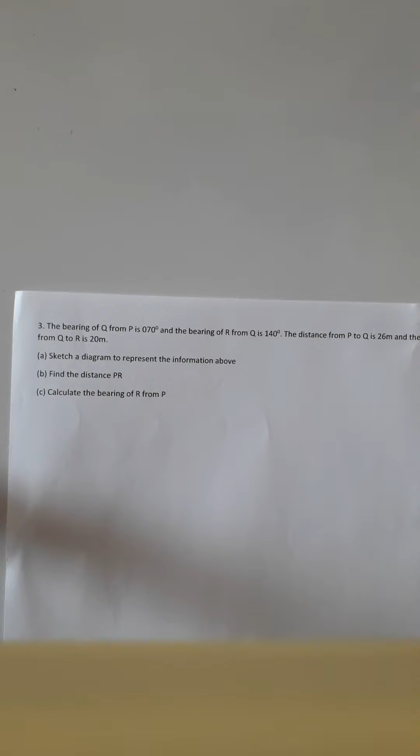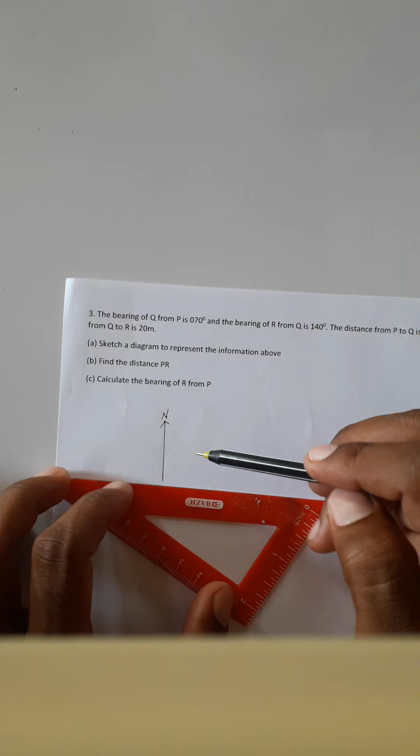Just try to draw a reasonable size diagram, not too big, not too small. The bearing of Q from P is 70 degrees, so here's 90. 70 degrees, so here will be P, the bearing of Q from P. So we start at P and then we head into Q, 70 degrees.

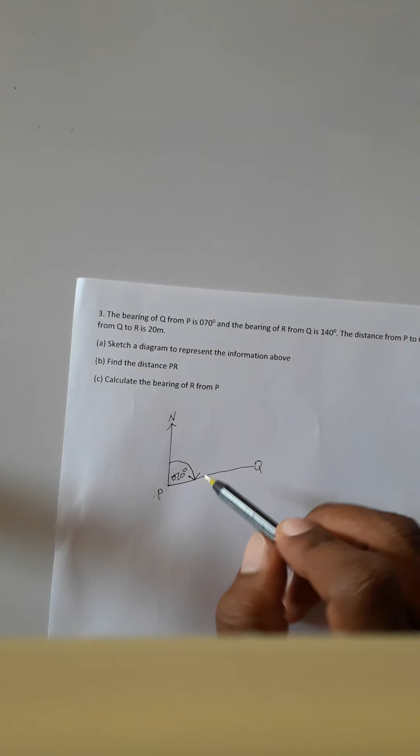And what is this distance? The distance from P to Q is 26 meters, so here's 26 meters. The distance from Q to R is 20, so this line Q to R will be shorter.

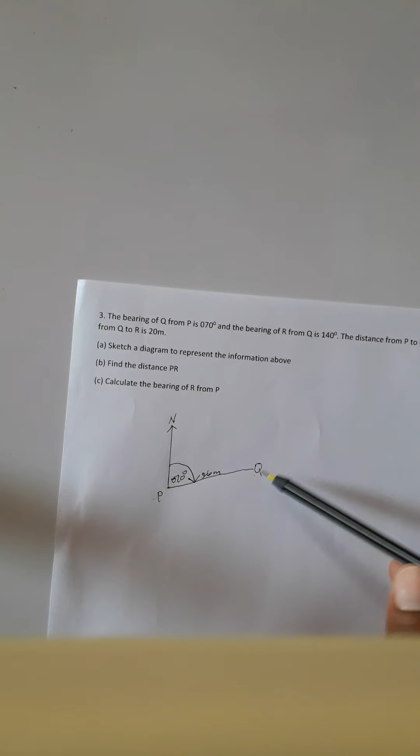What else? The bearing of R from Q, so since we are starting at point Q, we need to have a north line at point Q. The bearing of R from Q is 140 degrees. Ensure that this north line needs to be perpendicular, not slanted, so try to get it as straight as possible.

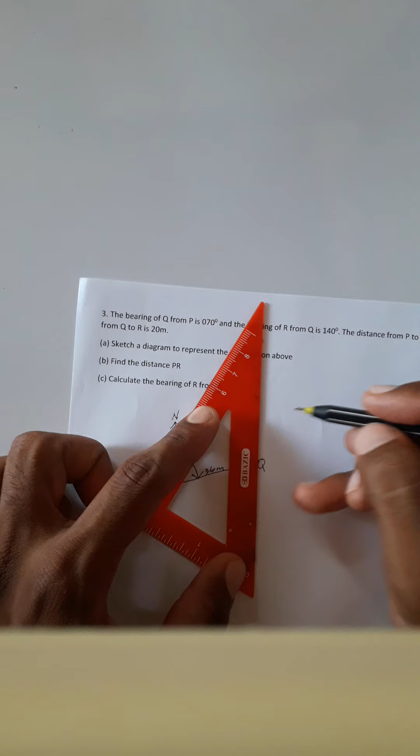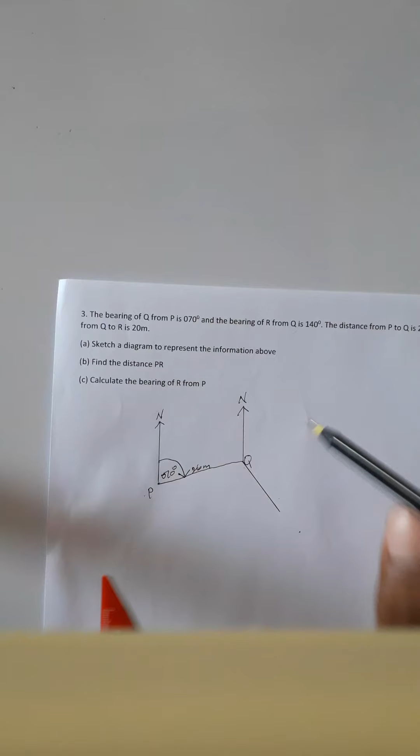The north line can have any length - it can even be longer than that one, it doesn't matter. So here is 140 degrees. I know here's 180 if I go straight down, where of course is 90. 140 should be somewhere there, so that is shorter. I'll get this line shorter than that one because the distance QR is 20, so here's 20 meters.

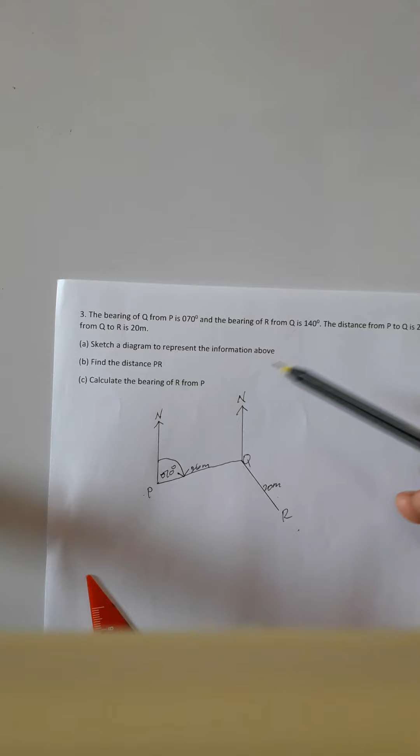Good, so that's our diagram. Part A is done. Part B: find the distance PR. So we want to find here.

I'll draw a broken line, and project this line. Don't forget to write this in - here's 140 degrees, I can write it inside or outside. Since from here to here is 140 degrees, this part inside will be 40 degrees, this little part. And here now, let me put it like this.

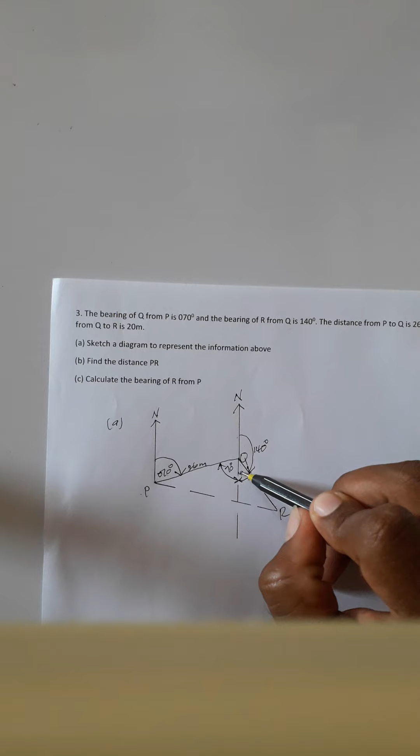So you can follow, here will be 70 and here will be 40. So the entire angle now will be 40 plus 70, which is 110 degrees.

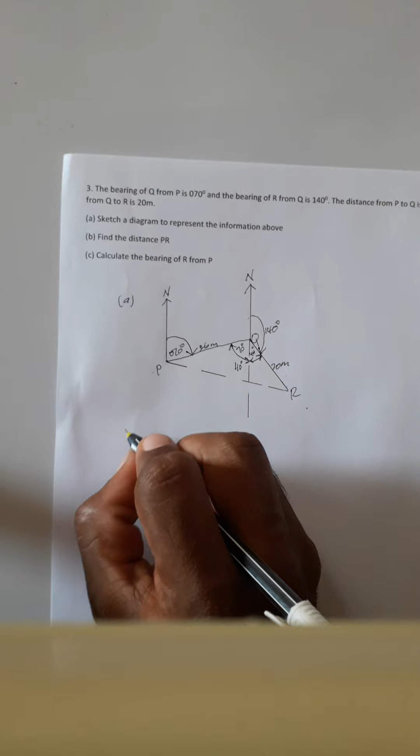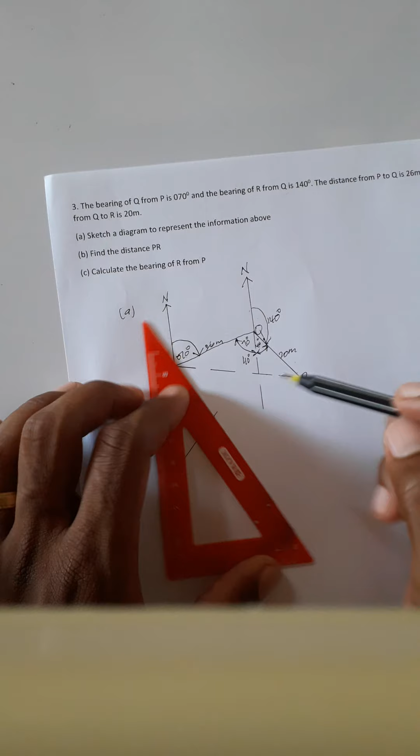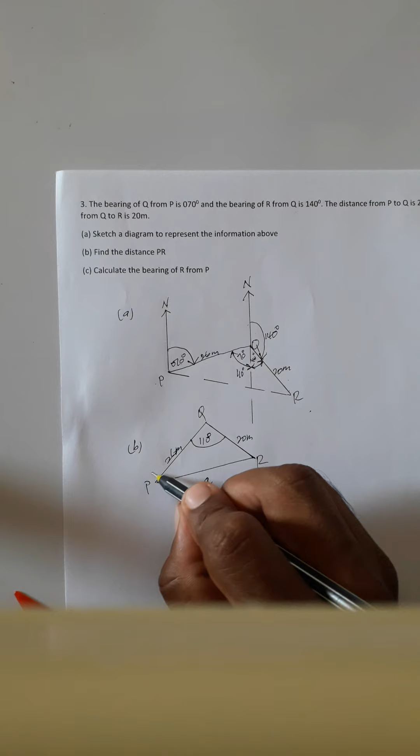For part B, what I need to do is draw back that diagram. So I have P, Q, R. Here's 110 degrees, it's 26 meters, 20 meters, and I need to find here. So here will be small q, small r will equal to that, small p will equal to that. So we want to find for Q, so you'll write the Q formula.

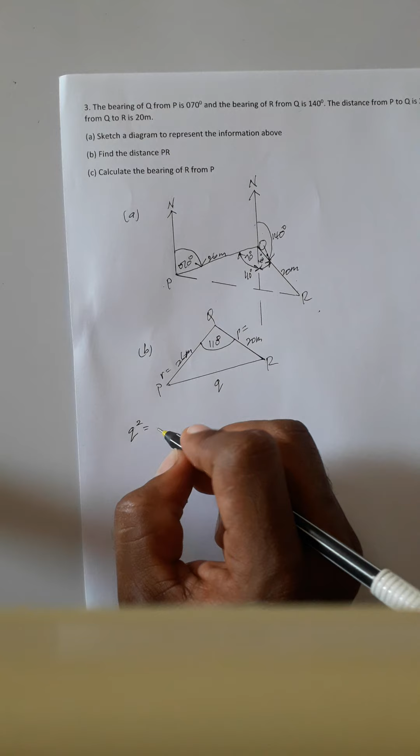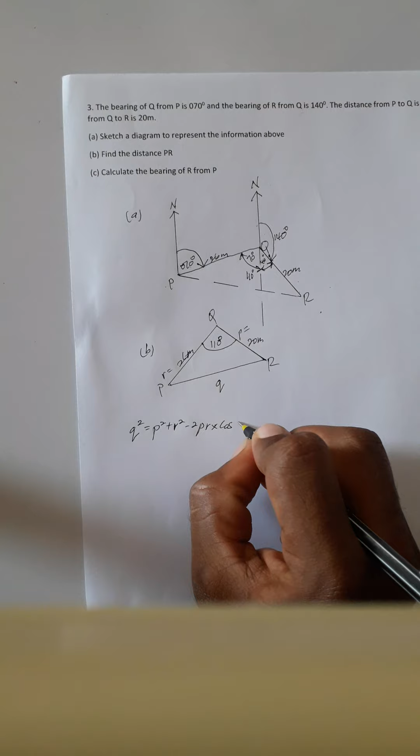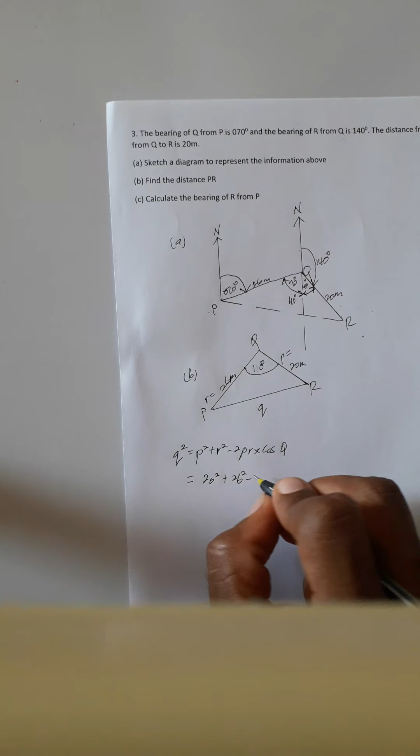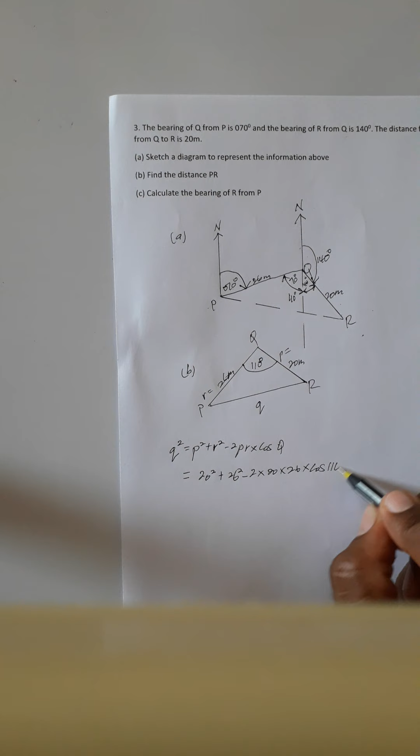Q squared will equal to P squared plus R squared minus 2PR times cos Q. So all we need to do is substitute the values into the formula. Here I'll have, what is P? P is 20, so therefore I have 20 squared plus 26 squared minus 2 times 20 times 26 times cos 110 degrees. If you want, you can take out the degree sign or write it, it doesn't matter.

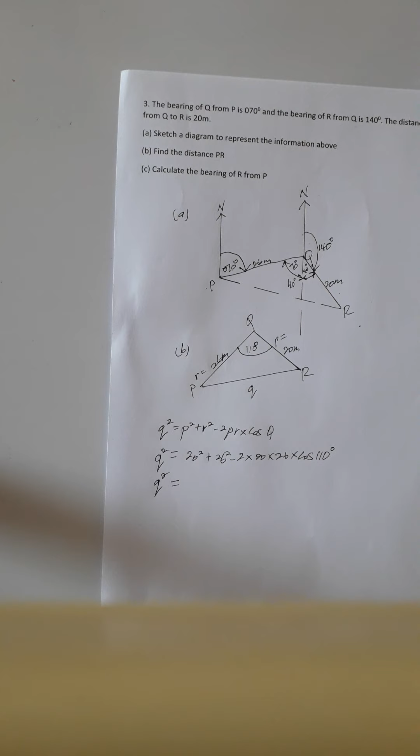So now we'll use our calculator and work all of that at once. 20 squared plus 26 squared minus 2 times 20 times 26 times cos 110 will give us - what do we have? 1431.701. So we have Q squared now.

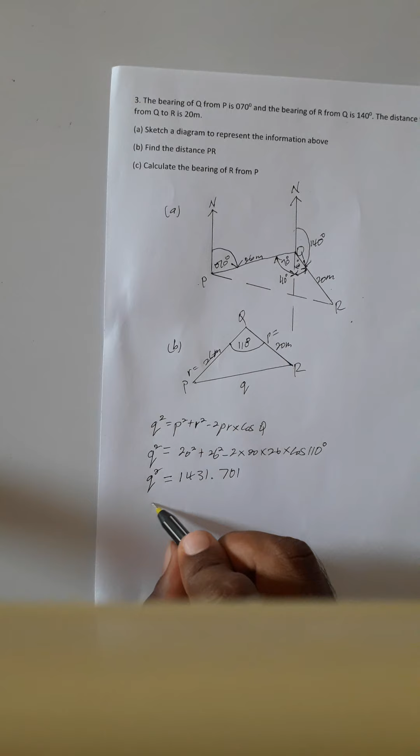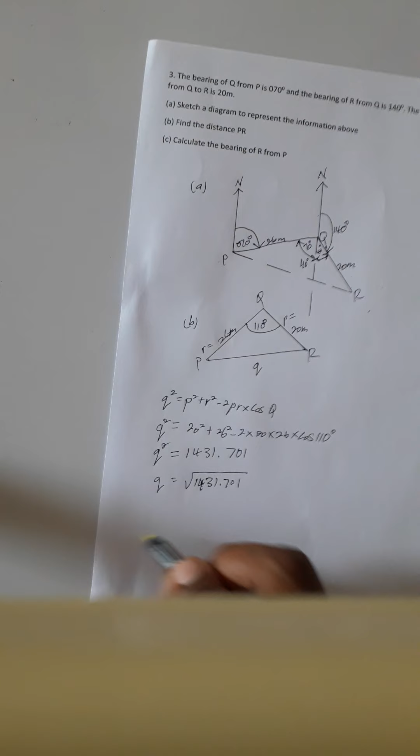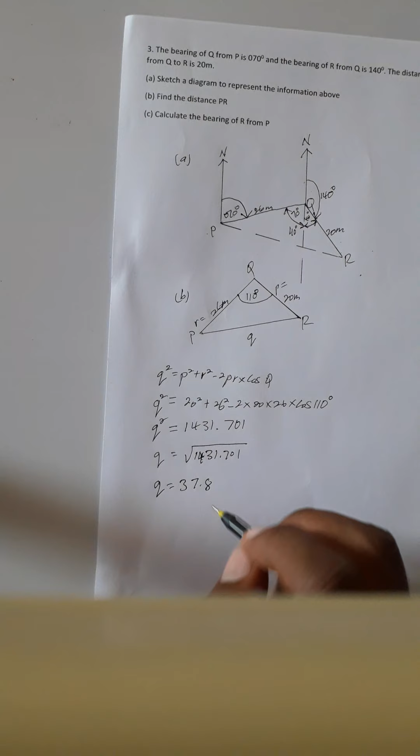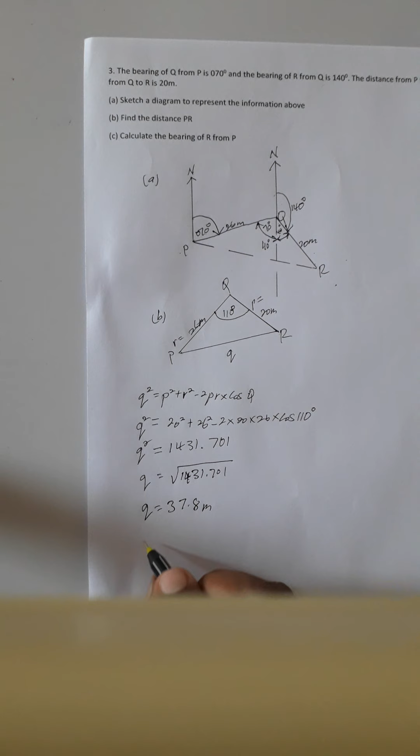We'll square root, leaving our answer in the calculator and we square root the answer. So let us square root our answer now. What do we have? I'll write it to one decimal place. I have 37.8, and that will be meters. So I can write now, since we want to find the length of PR, I can write PR equals 37.8 meters, correct, to 1 decimal place.

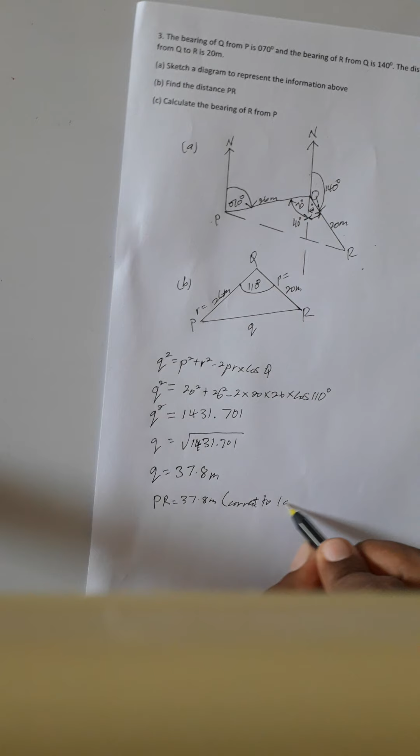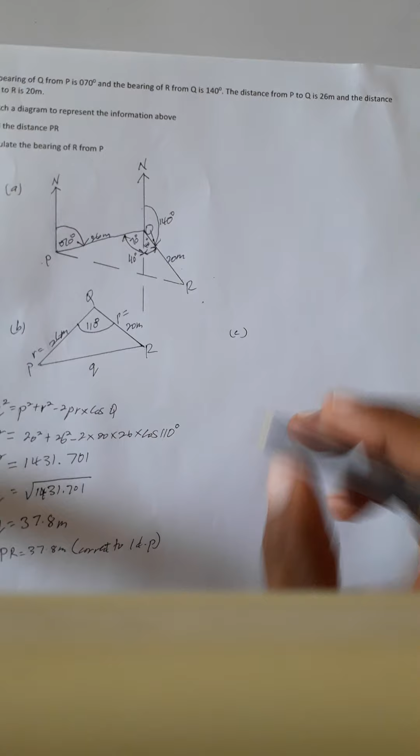Good, so that's part B. Now let us move on to part C, which I will do here. Part C: what does it say? Calculate the bearing of R from P, the bearing of R from P. So again, I need to find this.

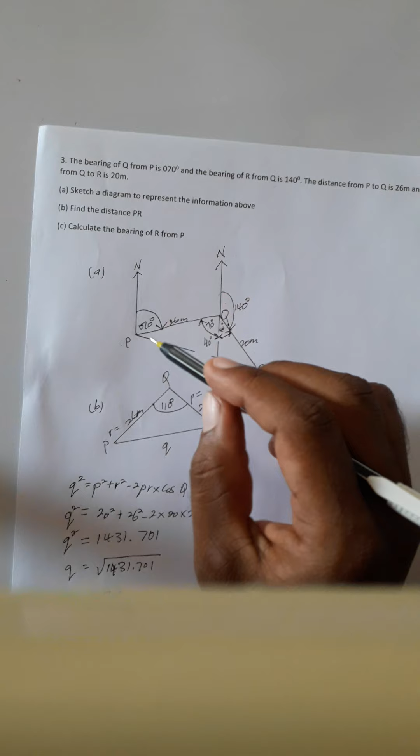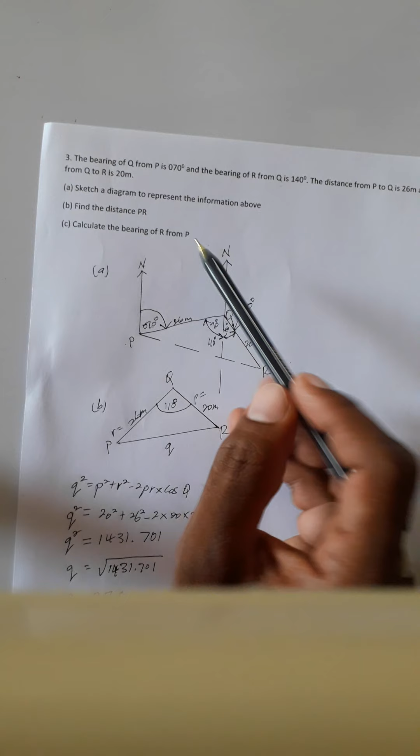So we know that this line here connects R and P, right? Again, if this question is calculate the bearing of P from R, at R we'll need to draw a north line and then get that bearing instead. Very good, so calculate the bearing of R from P.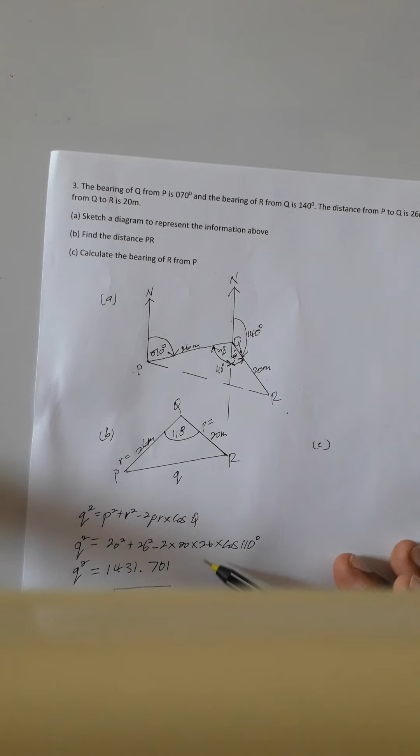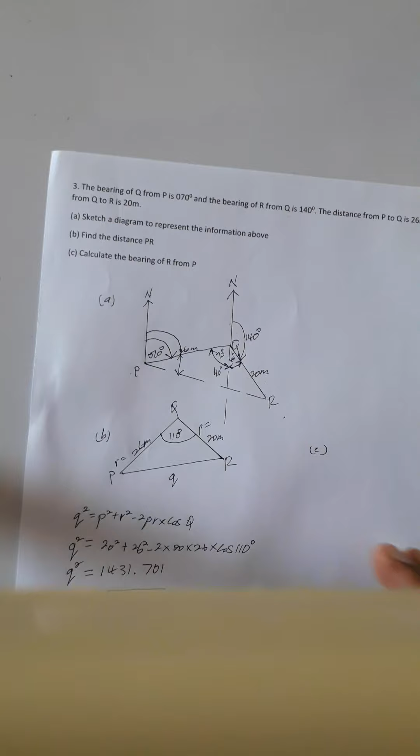So this is the bearing we need to find. We already know that it's 70, so we need to find this angle. Just draw back this - I'll use this triangle, make it easier.

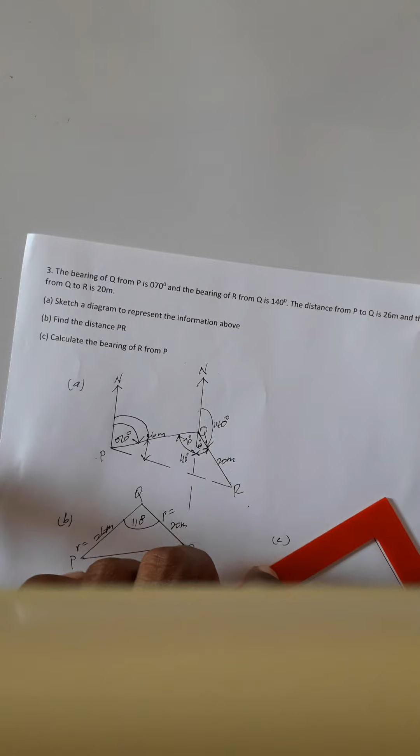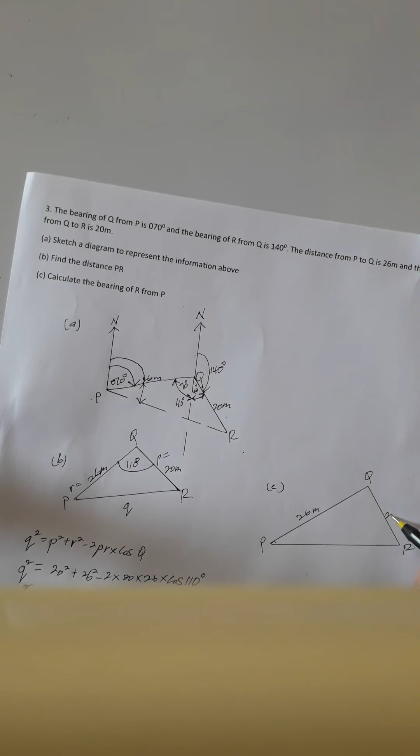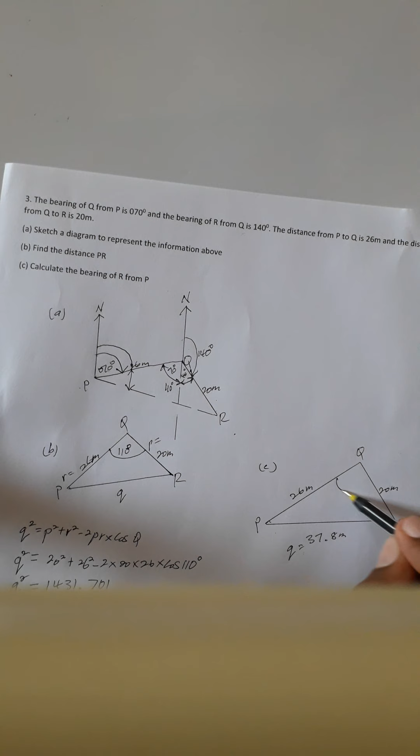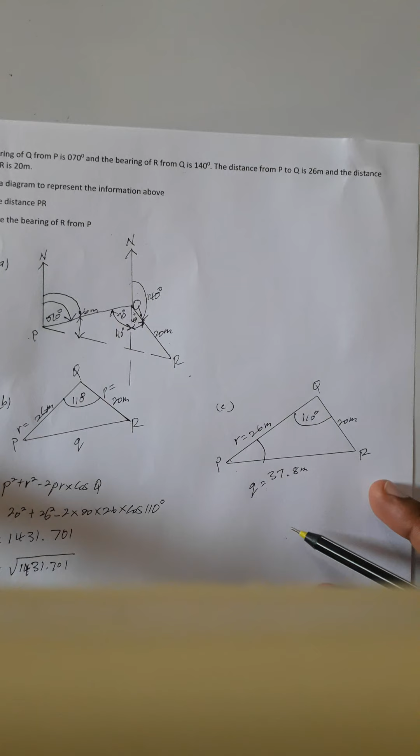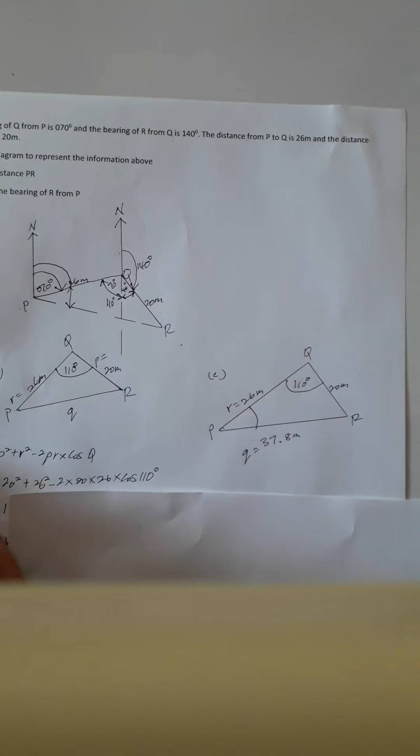So if you want to use cosine rule, you will write this formula instead, and you can try it: cos P will equal to Q squared plus R squared minus P squared over 2QR. You should remember this formula.

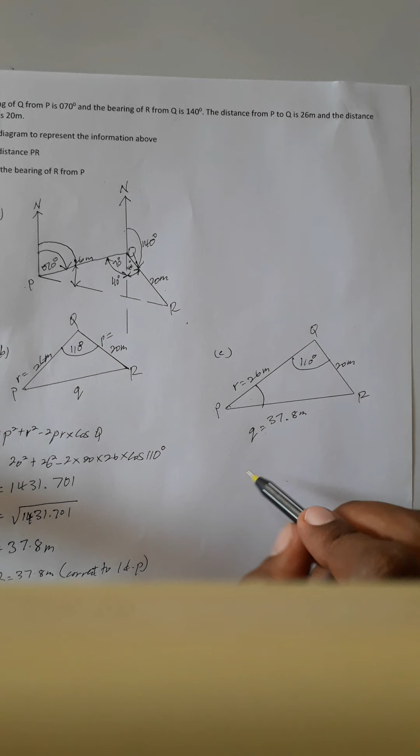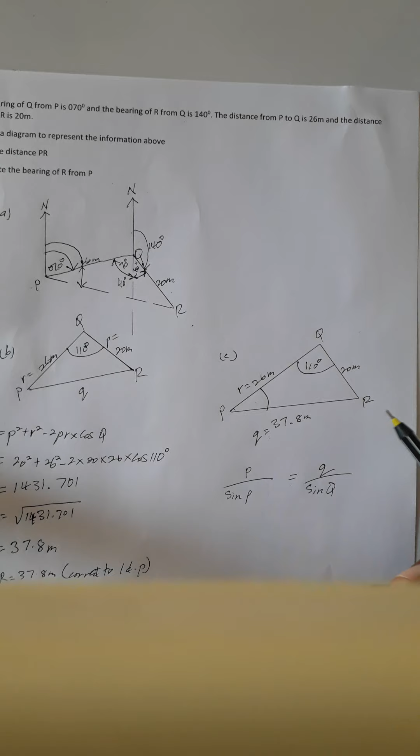Alright, what I'll use is sine rule. So I want to find for this angle, so I'll have to use sine P, and since this angle on this side is given, I use q sine Q as well. So I put P over sine P equals to Q over sine Q. P in this case, the distance P is that, so I'll have 20 over sine P, which we don't know as yet. Q is 37.8 over sine Q, which is 110 degrees.

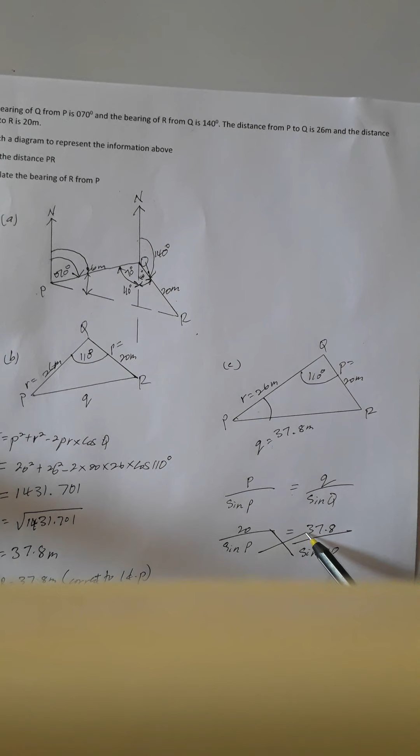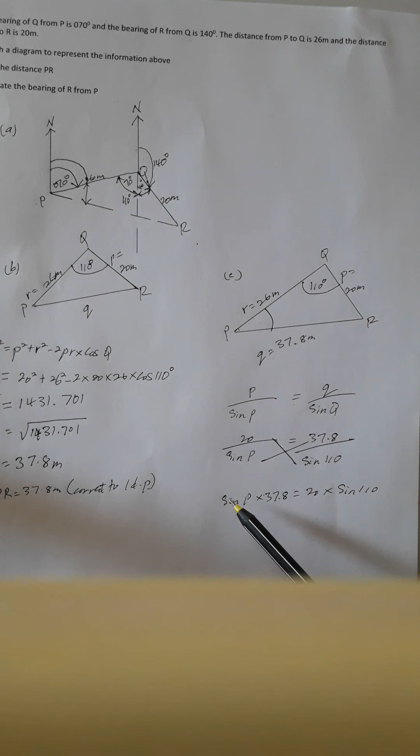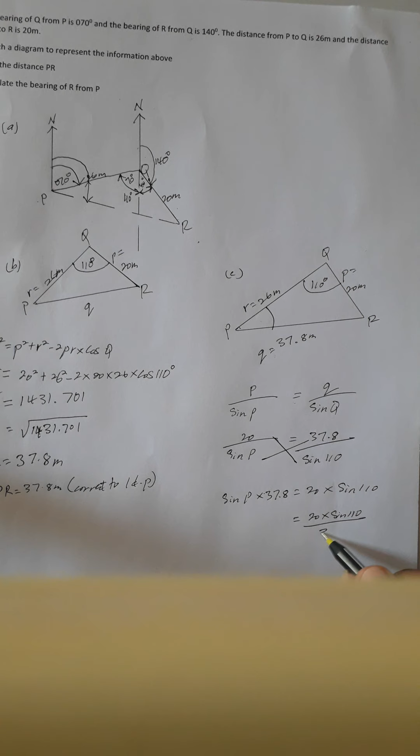We cross multiply: sine P times 37.8 equals to 20 times sine 110. Alright, our next step, we want to find for angle P. I'll take this across, it will divide, and I'll take sine, it will be sine inverse. So this now will become, let us write this back: 20 times sine 110 divided by 37.8. Alright, I didn't leave space.

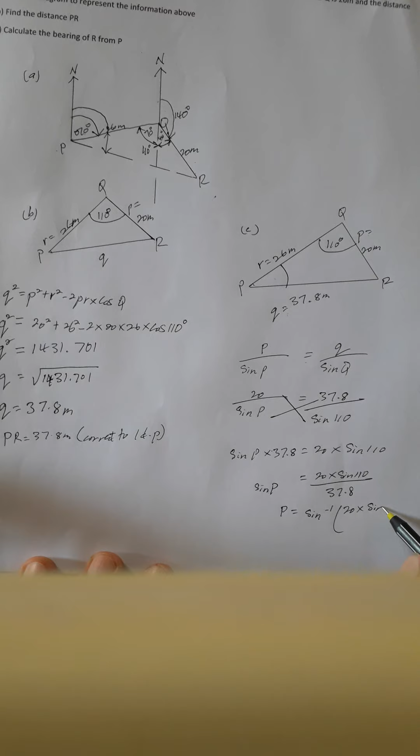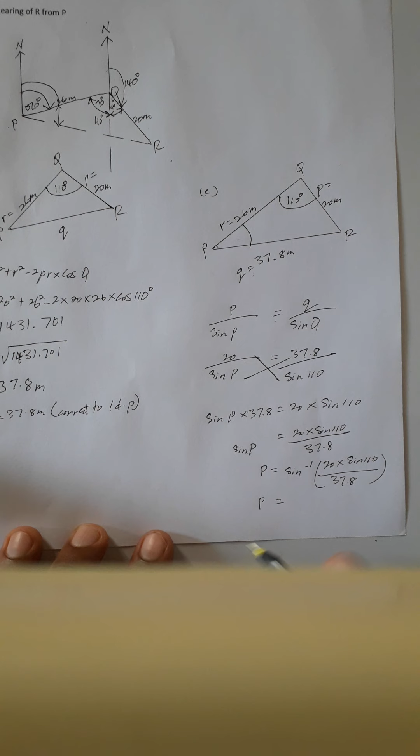Okay, let me just write it as this, sine P. Good, so now I'll take the sine, so P will equal to sine inverse, bracket 20 times sine 110 divided by 37.8. Calculator will do the job for us, and then we'll write the bearing. The bearing of what? R from P. The bearing of R from P is - okay, let me work this out and see what's the answer.

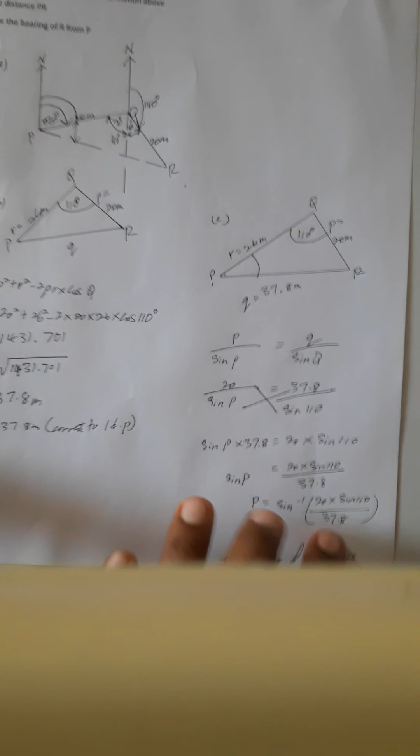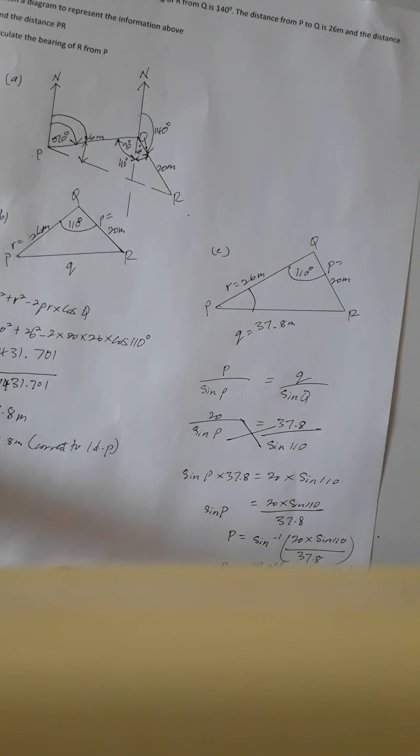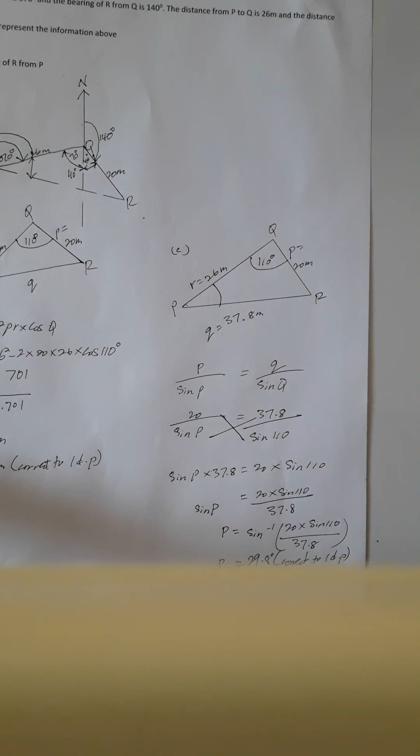20 times sine 110 divided by 37.8, what's that? Sine inverse it, you'll get 29.8 degrees. Good, so here I'll have to add 70 plus 29.8, that should give us 99.8 degrees. That's our answer.